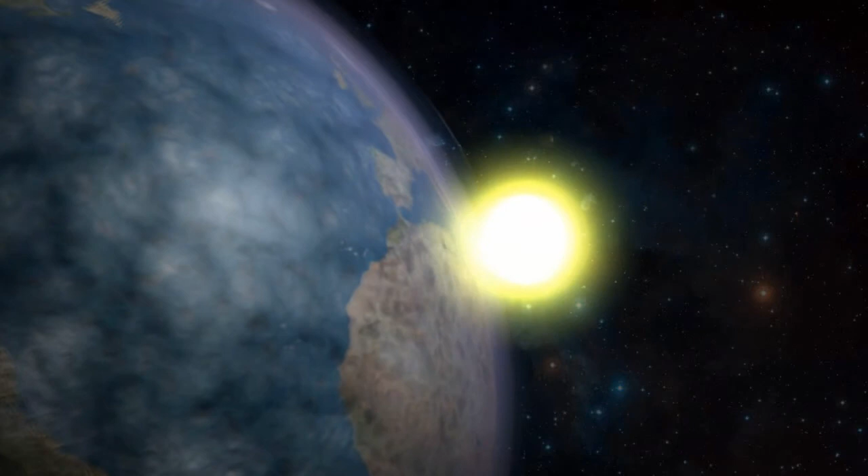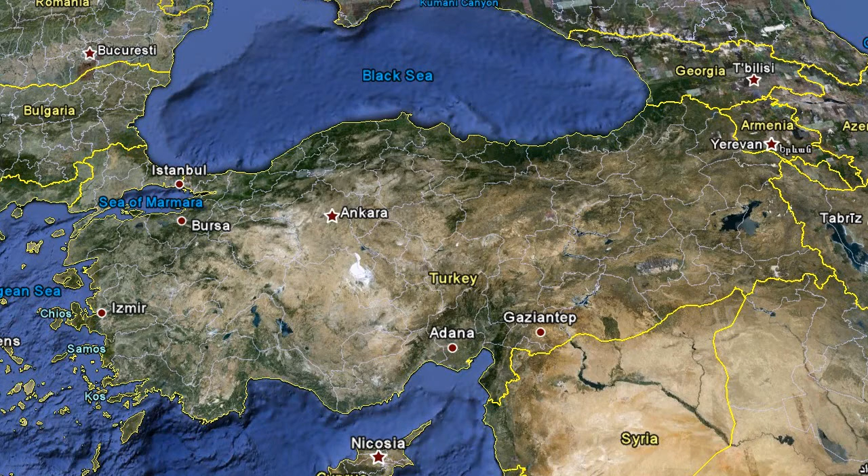This video has been prepared to share valuable information regarding the planned development of the Pervari Dam and hydroelectric power project. As one of the largest single-site hydroelectric power projects initiated by the private sector, the Pervari Dam project represents a significant investment in the future of southeastern Turkey. And with increasing awareness of the effects of global climate change, development of renewable energy sources such as the Pervari Dam project are especially important to the region and the nation.

Development of the Pervari Dam and Reservoir project will occur on Botan Creek in Siirt province, utilizing waters flowing from both Botan Creek and the Muku stream. Notable for its narrow and deep valleys and proven hydrology, the Botan Basin is one of the most suitable and underdeveloped river basins for hydroelectric power production in Turkey.

With an overall length of approximately 240 kilometers, Botan Creek originates in the southeastern Taurus Mountains at an elevation of 3,500 meters. Initially flowing in a northerly direction, Botan Creek converges with various tributaries, eventually turning west at an elevation of 2,000 meters. After flowing for 100 kilometers, it reaches the Pervari area and further downstream, eventually joins with the Tigris River at an elevation of 450 meters.

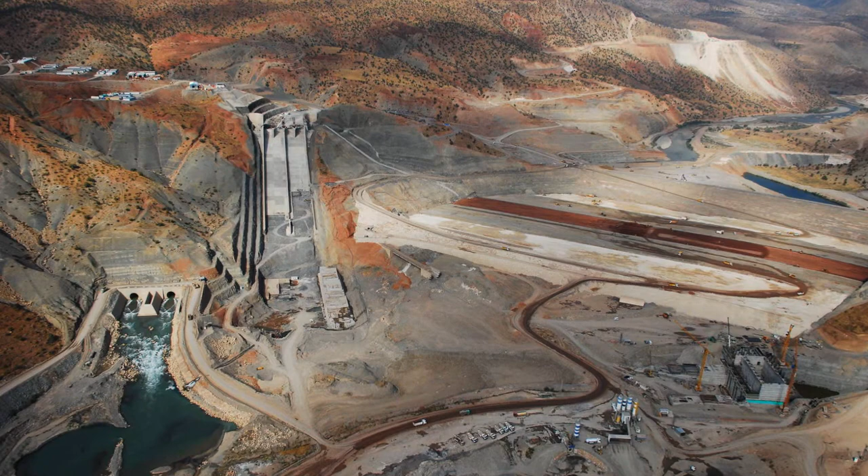Among numerous tributaries to Botan Creek is Muku Stream. By diverting a portion of the flows from Muku Stream to the Pervari Reservoir through installation of a diversion system, a significant increase in the amount of power generated by the proposed project can be achieved. In addition to the Pervari Dam project, other hydroelectric projects are being developed in the Botan Creek Basin to take advantage of its unique physical and hydrological characteristics.

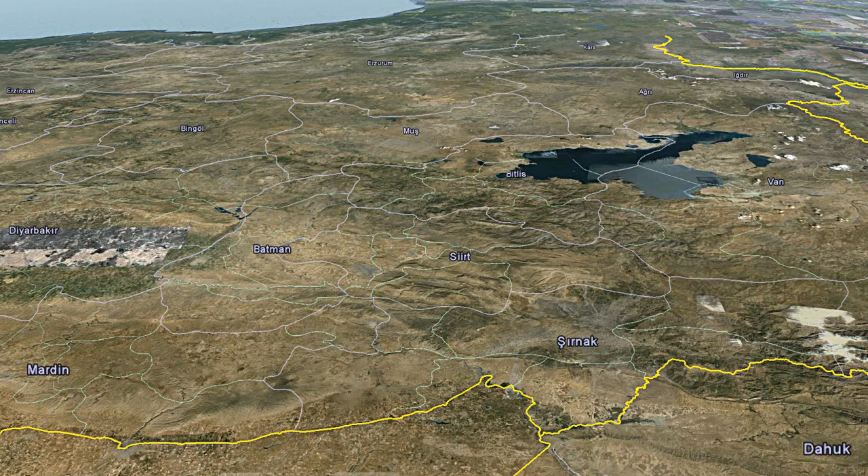Siirt province is among the more rural regions in Turkey and with approximately 300,000 residents, ranks 64th among Turkey's 81 provinces in terms of population. The area within Siirt province located closest to the project site is Pervari district. As is the case throughout Siirt province, most of the district's 33,000 residents rely upon agriculture and livestock farming to earn their living. Located only 6 kilometers from the project site is the town of Pervari.

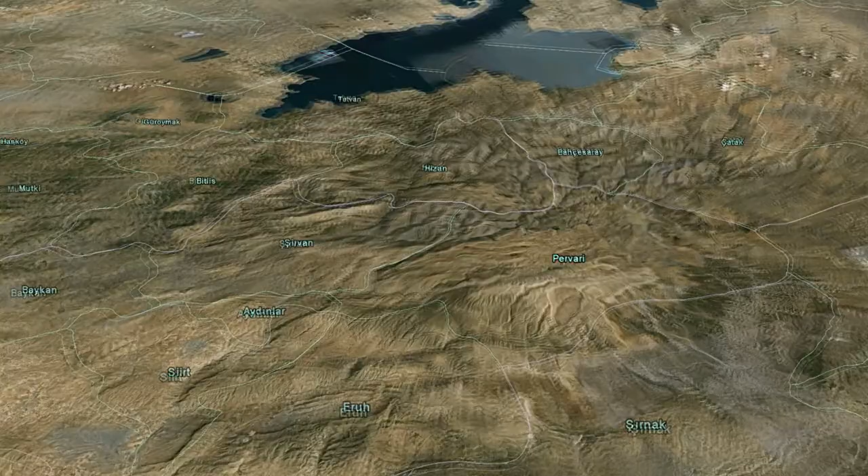Nestled high in the hills overlooking Botan Creek, Pervari is a small, quaint, and peaceful community of 3,500 residents. Here too, the economy is highly dependent upon the growing of grains, fruits, nuts, and vegetables, and the breeding of sheep, goats, and cattle. On the basis of extensive engineering, geotechnical, and hydrological studies, an ideal location for the Pervari Dam project has been identified just upstream of the town itself.

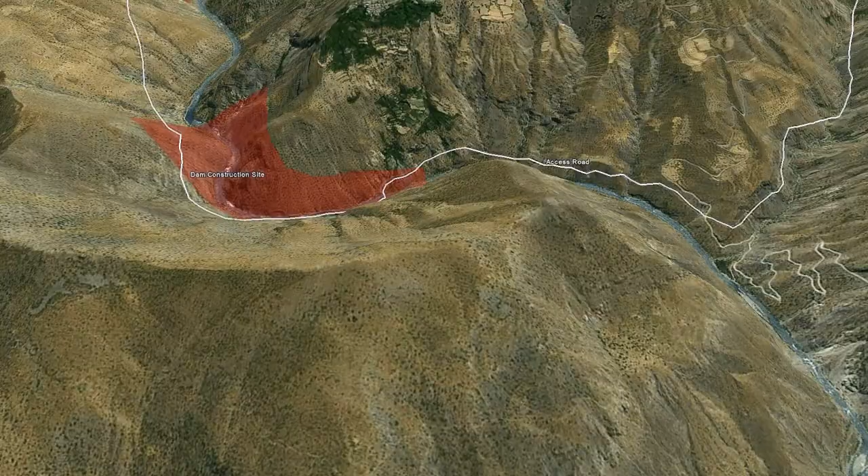Along with construction of the dam and reservoir, other major project components include a diversion tunnel and water intake structure, power tunnels, a powerhouse, upstream and downstream cofferdams, and the Muku stream diversion weir, inlet and outlet structures, and diversion conduit. Each would be developed within a construction zone straddling Botan Creek and Muku Stream. Among the first tasks undertaken will be construction of a road to the project site and a bridge to allow access to both sides of Botan Creek.

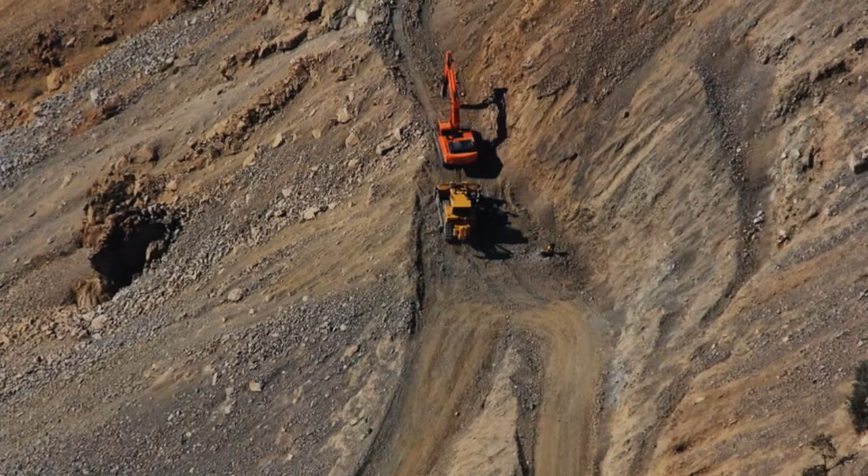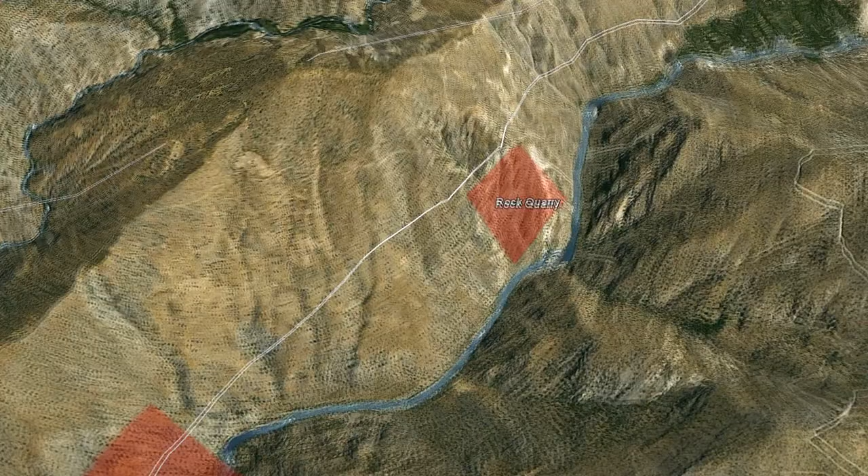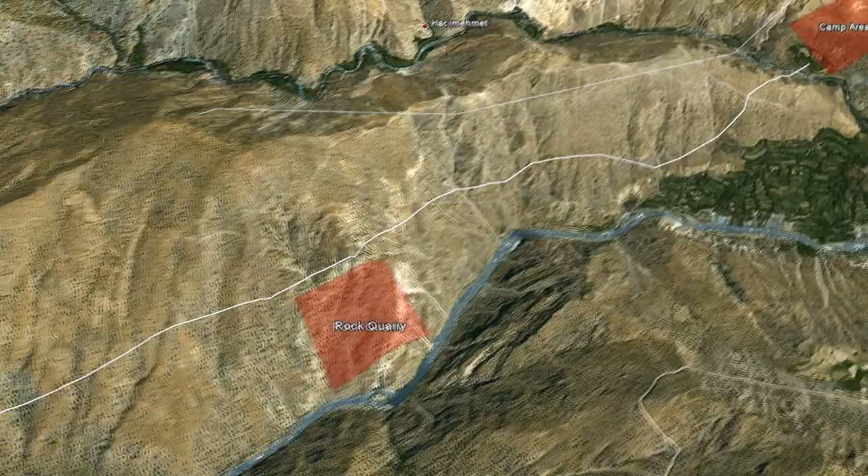Installation of such a road will allow easy access to the work sites by workers, equipment, and materials throughout the period of construction. The new road would also link the construction zone with a quarry to be developed within the eventual reservoir area. It is from this quarry that a large portion of the raw materials needed for dam construction will be acquired. A workforce of up to 1,000 workers will be needed to construct the Pervari Dam project, and so a self-sufficient construction camp will also be developed near the project site.

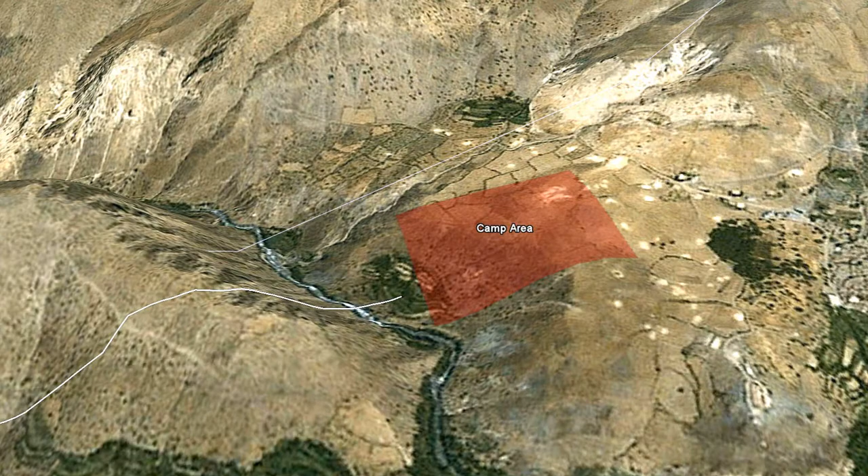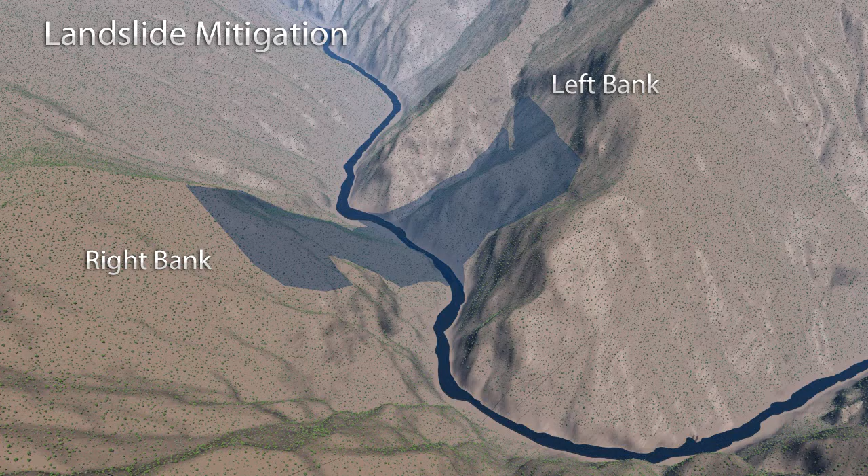The camp will include offices, workshops, storage and maintenance yards, and other support facilities. Worker housing along with dining, recreation, healthcare, and other services will also be provided as part of camp development and operation. It is in this time frame that construction of the Müküs Stream diversion system would also occur. There are inactive landslides located on each side of Botan Creek, just upstream of the dam site, that require attention early in the construction process. Each was carefully evaluated and a mitigation plan developed to ensure the safety of the dam and reservoir.

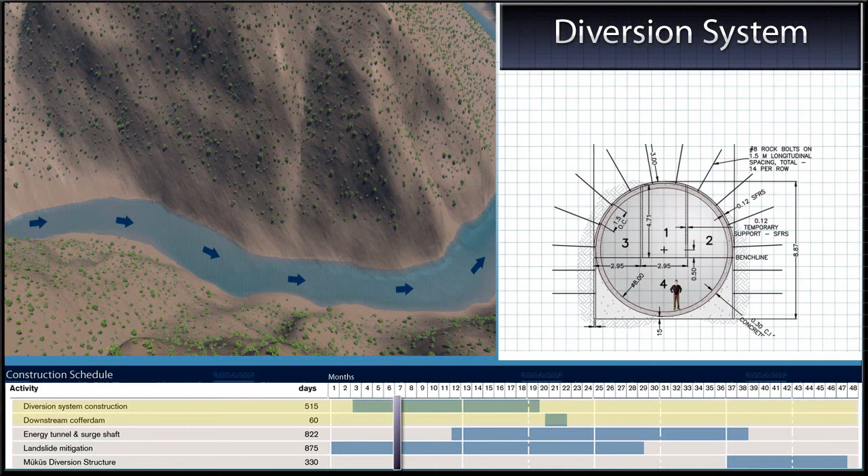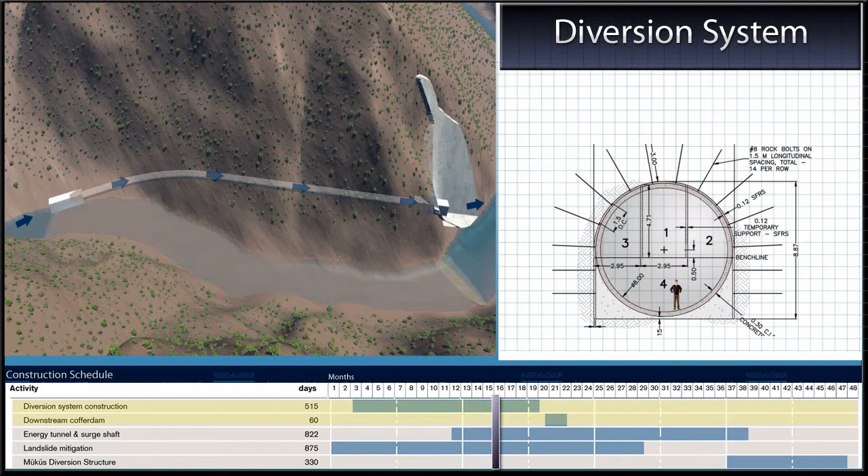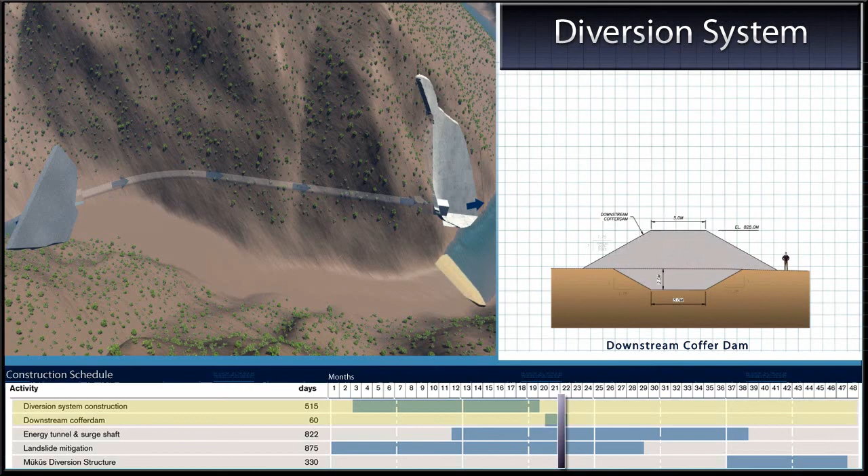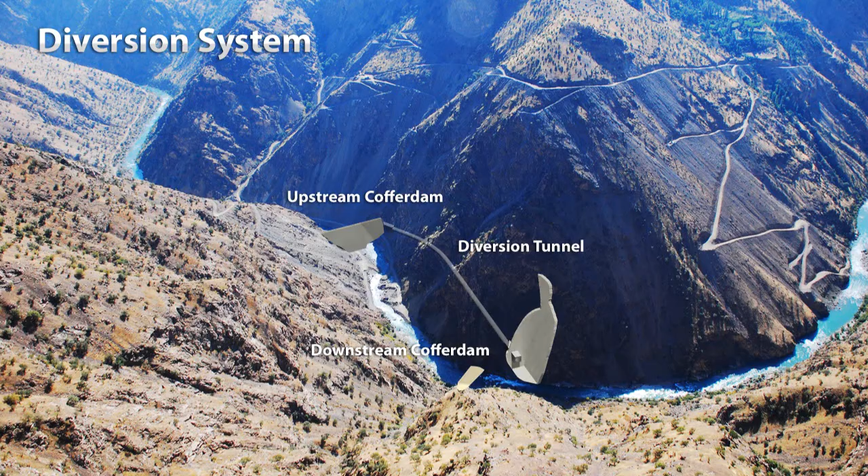To allow for dam construction, diversion of Botan Creek from its natural streambed is necessary. During this stage, an 8-meter diameter diversion tunnel and auxiliary intake and outlet structures are constructed. Botan Creek is then allowed to flow through the diversion tunnel, diverted by upstream and downstream diversion dams. The upstream cofferdam will be constructed of roller compacted concrete and extend to a height of 30 meters, while the downstream cofferdam will be rock fill and extend to a height of 4 meters. Construction of the diversion system is scheduled to occur over a 19-month period, after which construction of the dam spillway and bottom outlet structures can proceed.

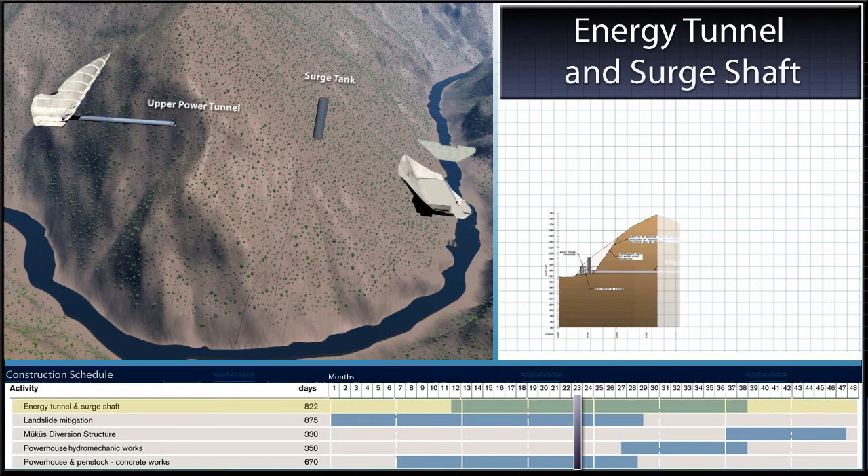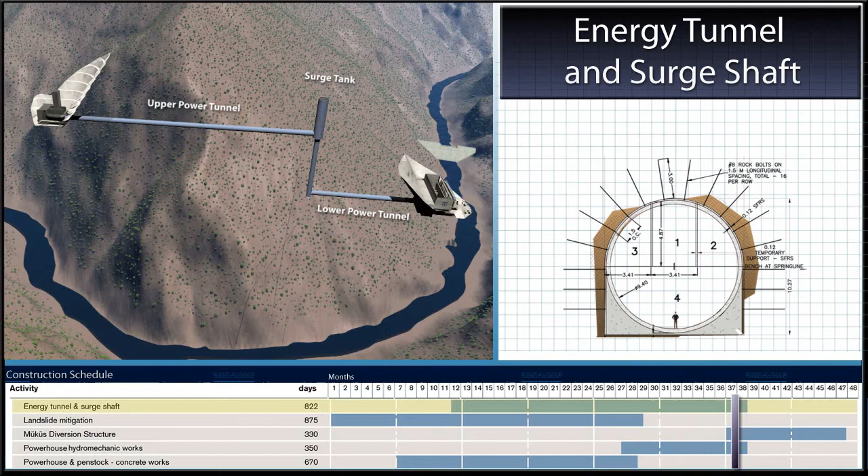To provide the energy needed to power the turbines and generate electricity, upper and lower power tunnels and surge tank will be constructed. Extending 422 meters from the water intake structure, the upper power tunnel will connect to a surge tank located upstream of the powerhouse. The surge tank, 15 meters in diameter, will extend from just below the upper power tunnel to a few meters above the ground surface. Below the surge tank, a 119-meter long vertical shaft will connect the upper tunnel to a lower tunnel, which will extend 208 meters to the powerhouse. Construction of the power tunnels and surge shaft is expected to take 27 months, during which time construction of the dam itself will be well underway.

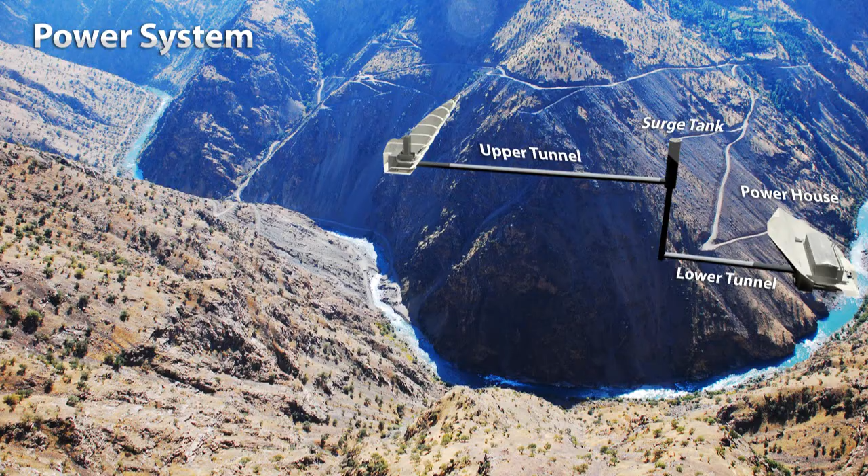Construction of the Pervari Dam will utilize roller compacted concrete, or RCC. Use of RCC is well proven and time tested and has 3 characteristics that make it ideally suited for dam construction: performance, economy, and speed of construction.

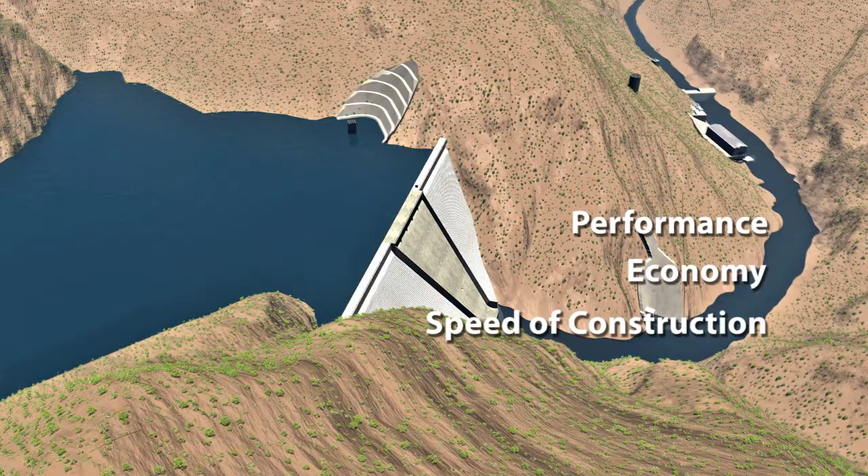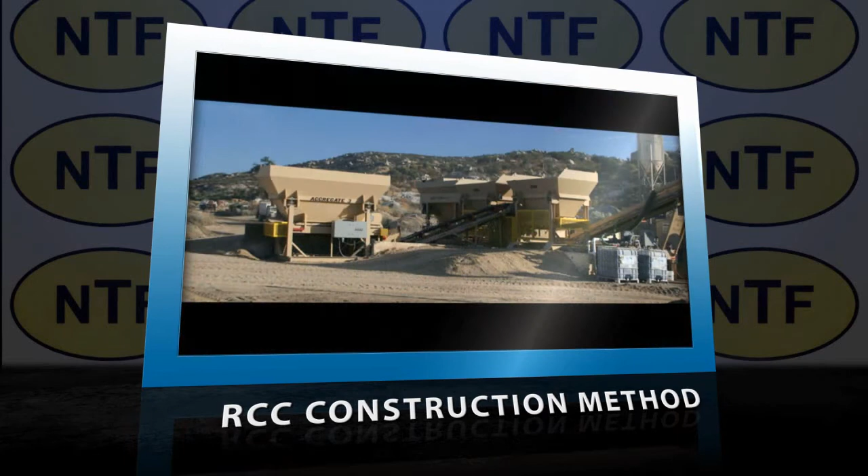Roller compacted concrete consists of the same ingredients as conventional concrete: cement, water, and aggregates. Batch plants will be established at the project site to produce the volumes of RCC needed on a daily basis. Almost 3 million cubic meters of RCC will be used in construction of Pervari Dam.

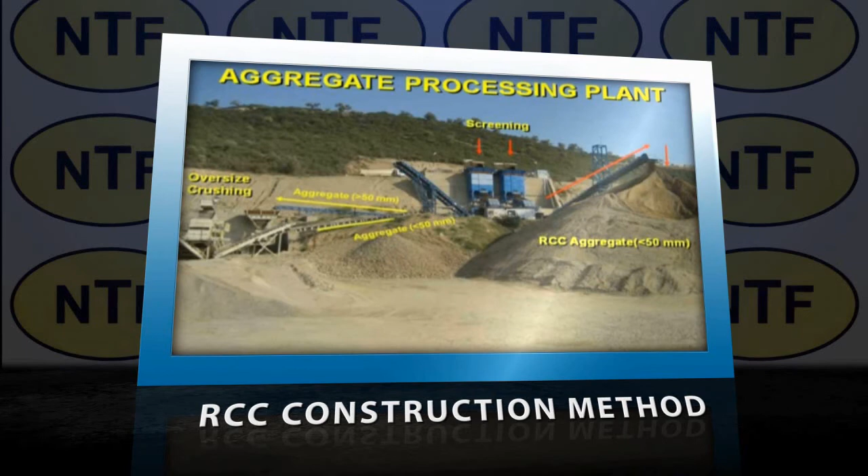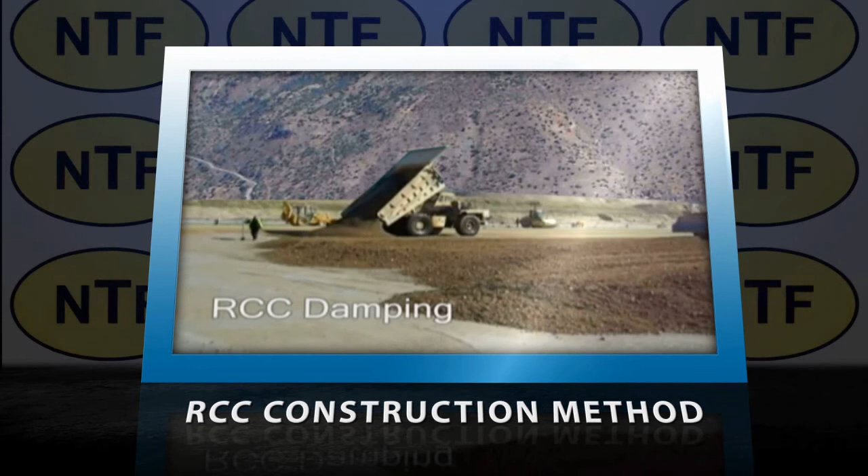Conventional concrete will also be needed, and a mobile batch plant will be used to provide conventional concrete for construction of the powerhouse and various other structures. But because RCC is much drier than conventional concrete, it can be placed easily using large volume earth-moving equipment instead of mixer trucks. After leaving the loading area, each dump truck travels to the leading edge of the RCC placement and backs up over earlier RCC placement.

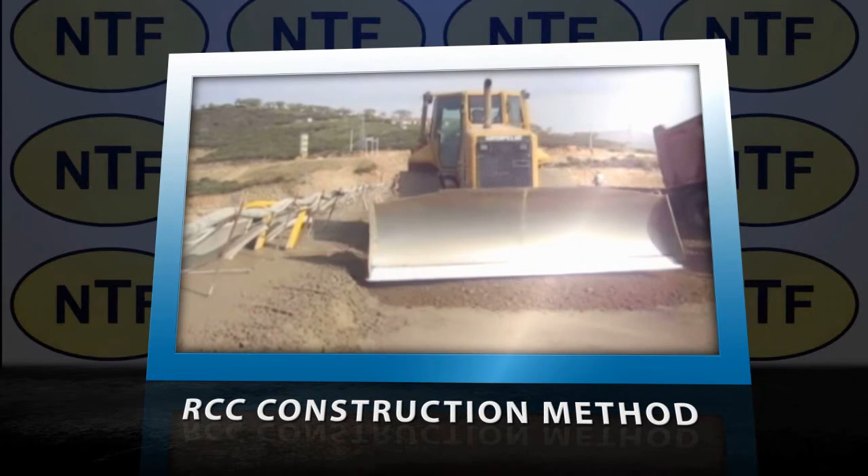As the truck unloads, it moves forward, delivering the RCC and returning to the loading point to refill. Bulldozers then move in to spread the new RCC. A parade of smooth drum vibratory rollers then passes over the RCC, pressing the loose material into a dense, hard layer. Once a layer is placed, it can immediately support the equipment needed to place the next layer.

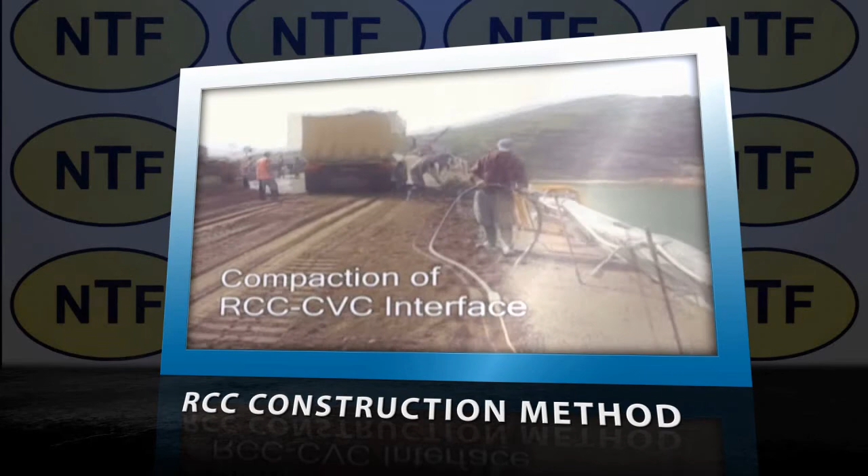Conventional concrete plays an important role in dam face construction, and careful attention is devoted to ensuring that the interface between the placement of RCC and conventional concrete is to the highest standards. Before placing fresh RCC, the previous lift surface is washed and cleaned with high-pressure water and air.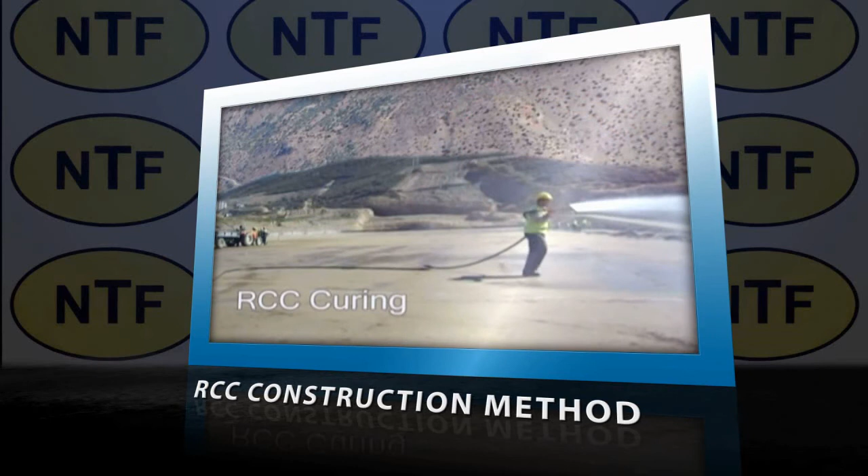A backhoe with a special attachment installs transverse contraction joints in fresh RCC at regular intervals to prevent uncontrolled cracking as the concrete cures. The compacted RCC receives a continuous mist of water to promote curing until subsequent layers are placed.

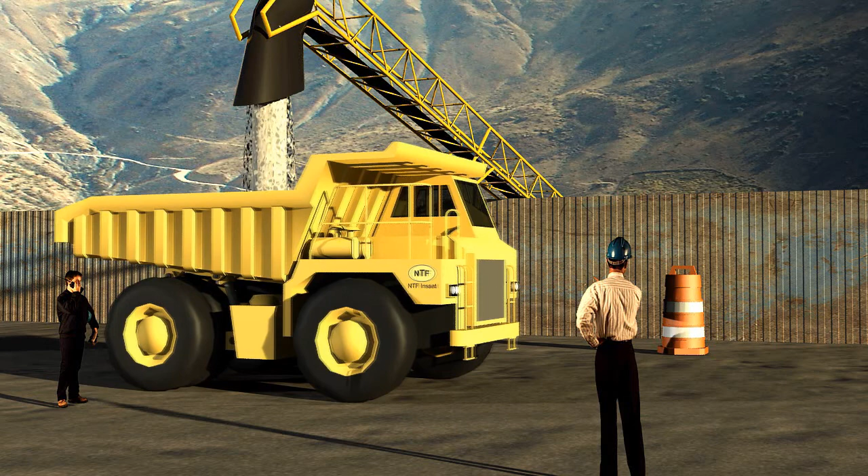Dam construction involves placing RCC in a sequence of carefully timed steps, requiring continuous coordination of batch plant operation, conveyor belts, pumps, trucks, rollers, and workers. In the case of Pervari Dam, RCC from the batch plants will be discharged to a conveyor system and delivered to a hopper at the truck loading area. When a truck pulls up to the loading point, the hopper's gates open and RCC is released, filling the bed of the truck.

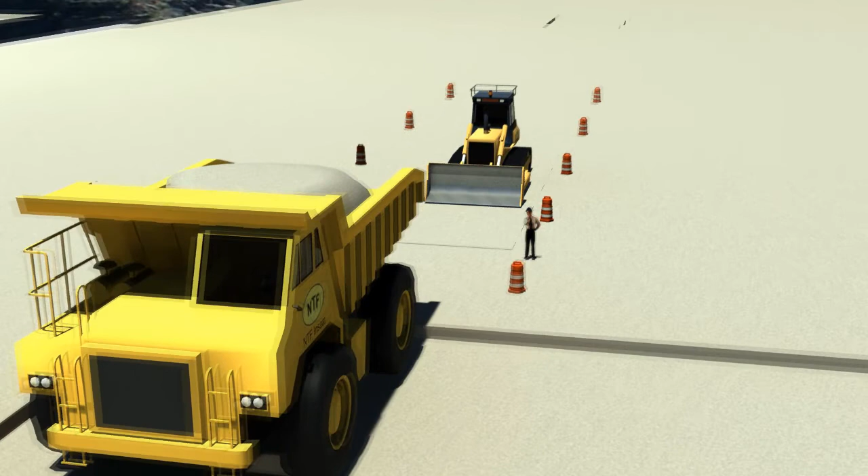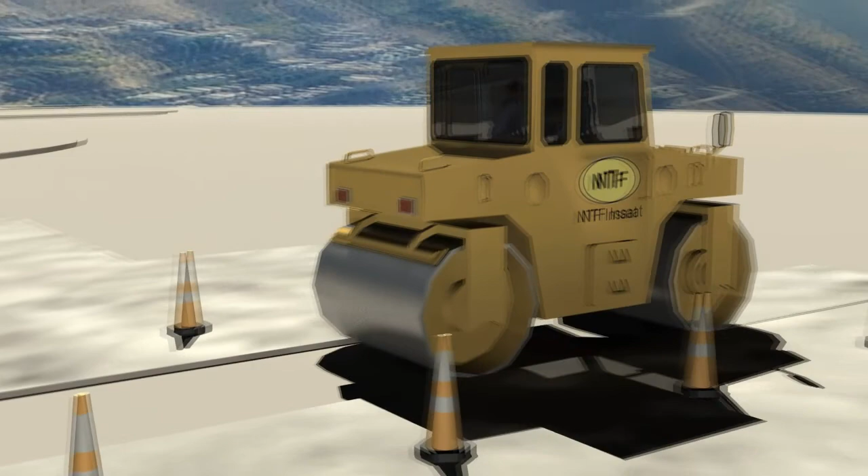RCC is then transported by dump trucks, spread by bulldozers, and compacted by vibratory rollers. The dam is built up quickly as individual layers or lifts of roller compacted concrete are placed, leveled, and compacted in a continuous process. RCC has the strength and durability of conventional concrete, and in addition to its performance advantages, the ability to use conventional construction methods and equipment makes RCC an economically attractive technique.

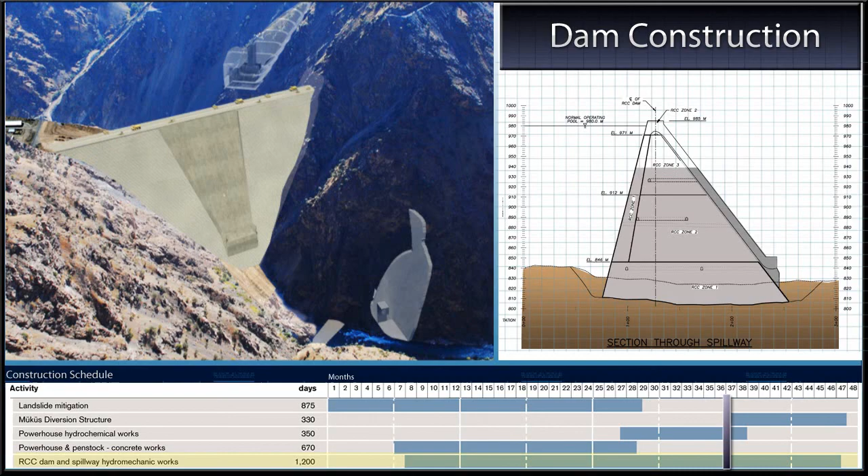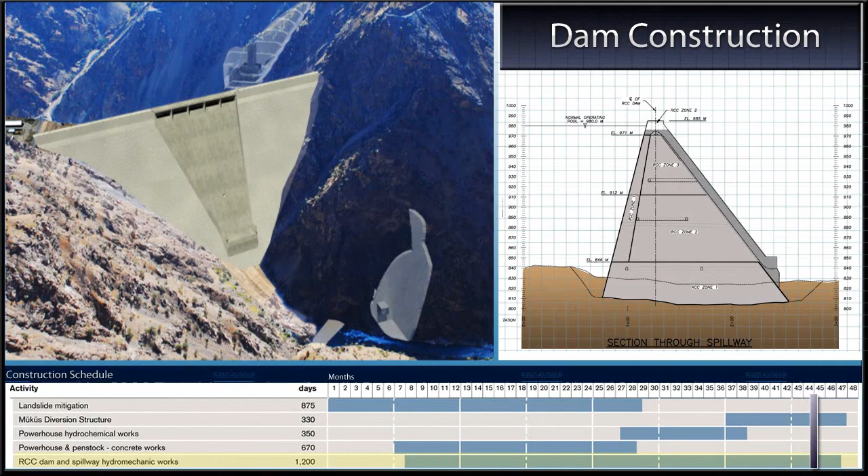Sections are built lift by lift in successive horizontal layers, so the downstream slope resembles a concrete staircase. Construction of Pervari Dam is expected to take approximately 39 months.

Development of the powerhouse will occur in a deep excavation located at the base of a steep hill approximately 800 meters downstream of the dam. The excavations will be designed and carried out to encompass the steel penstock area, which connects with the lower power tunnel at this location.

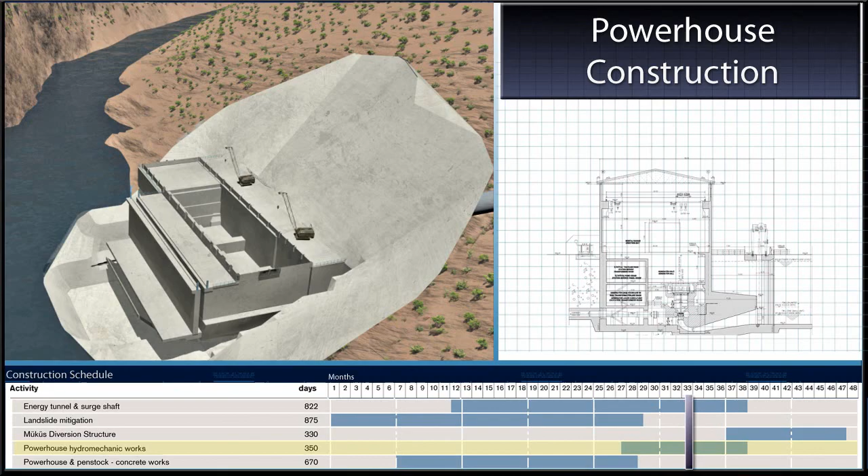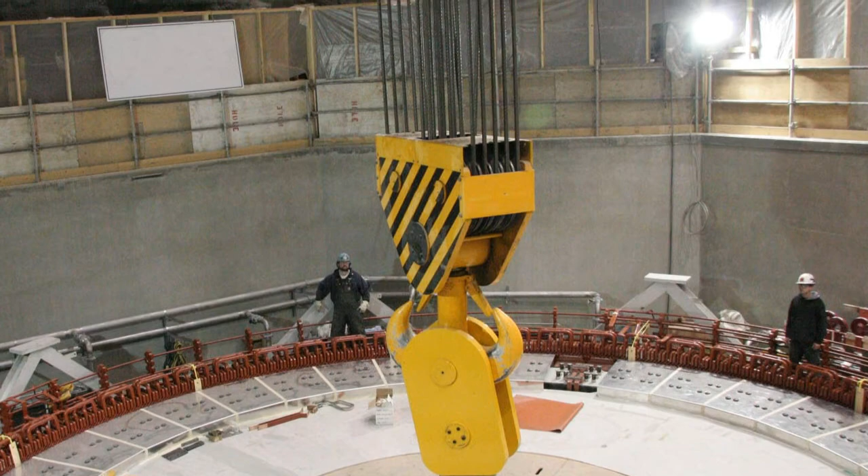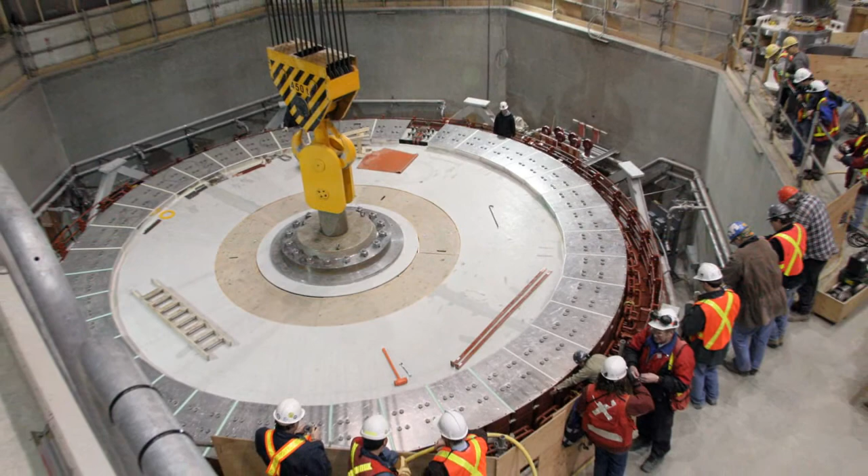Designed for a total installed net capacity of 400 megawatts, the powerhouse will contain 4 vertical axis Francis turbine generator sets. The 2 main turbine generator sets are each rated at 190 megawatts, and the 2 minimum flow turbine generators are each rated at 10 megawatts. Construction of the powerhouse and penstocks will occur over a 22-month period, followed by installation of the powerhouse hydromechanic works during an additional 12-month period.

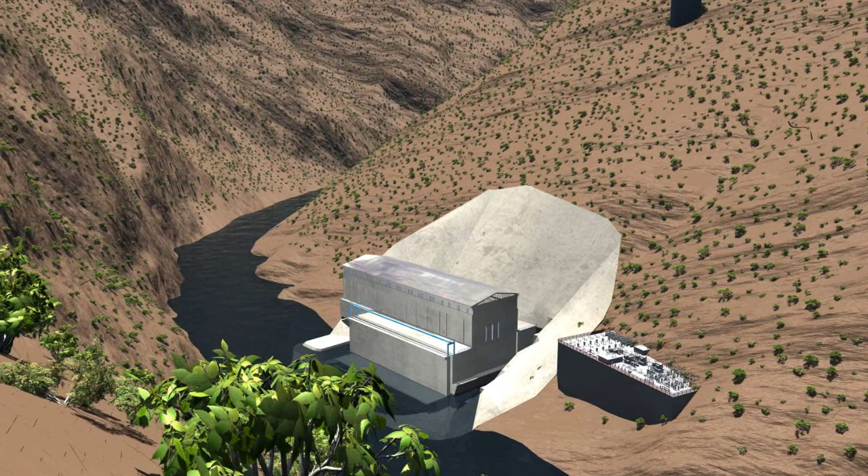The Pervari hydroelectric power plant will function as a peaking plant during 9 months of each year when water flows are low in Botan Creek. During periods of low flow, water would collect in the Pervari reservoir for most of the day, while 1 or 2 of the minimum release turbine generator sets would operate to provide the required ecological water releases to Botan Creek. During periods of high flow, all turbine generator sets would operate during the daily and peak load periods and operate as required during overnight periods.

Among the last components of the project to be constructed will be the Mukus stream diversion system. Designed to economically move a significant amount of water from Mukus stream, the diversion system will greatly increase the amount of power generated by the project. The Mukus diversion system will consist of a diversion weir to impound and direct Mukus stream flows through an inlet channel and inlet structure. A concrete conduit would then carry the diverted water to an outlet structure at Pervari Reservoir. Construction of the Mukus stream diversion system is scheduled to occur over a 10-month period.

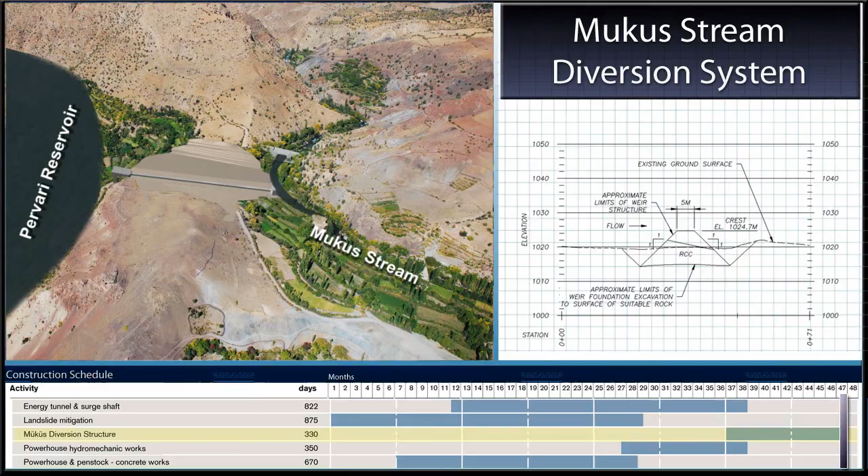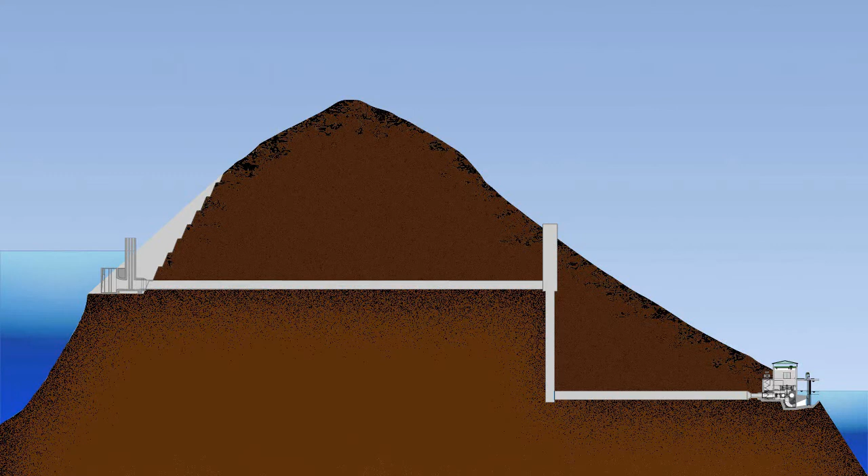Construction of the Pervari Dam and hydroelectric power project is to begin in 2010 and be completed in 2014. When this milestone is reached, water from Pervari Reservoir will flow from the dam intake through the upper and lower power tunnels into the powerhouse and through the turbines. The generators will then start producing 400 megawatts of environmentally friendly, sustainable energy.

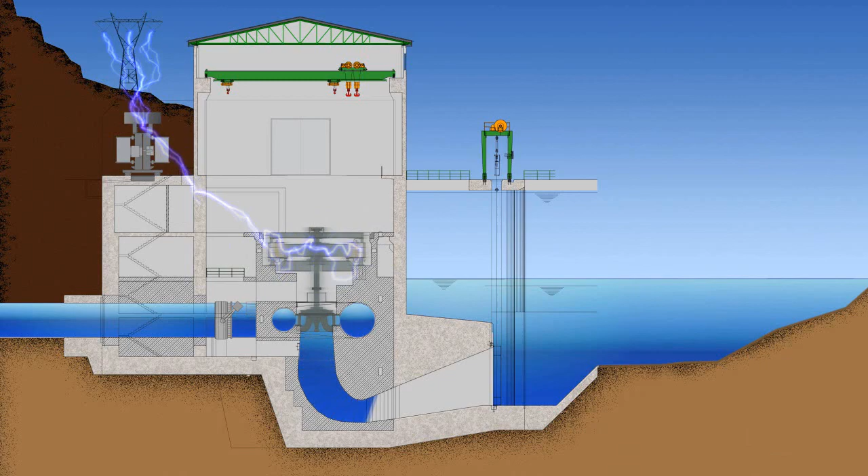Turkey is one of the fastest growing electricity markets in the world, and clean, renewable electrical energy is in high demand to sustain continued economic development. You have the opportunity to meet this demand by participating in this exciting and financially attractive venture.